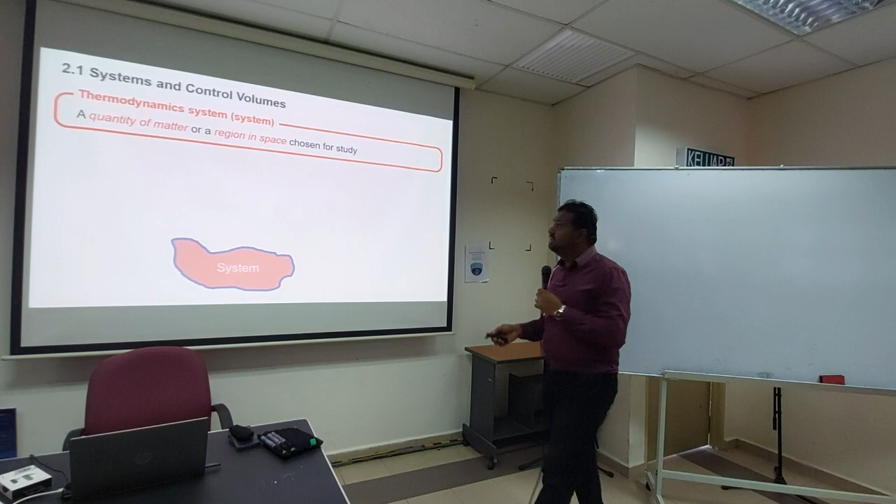Second, surrounding: the mass or the region outside the system. So you have a system and you have a boundary, the blue color, and apart from that you have a surrounding. This is what we call a surrounding: the mass or region outside the system, whatever is around the system. So in today's lecture we will study certain related terms. Then we have boundary.

The boundary is the real or imaginary surface that separates the system from its surrounding. You can see based on the color; here it looks like red, but it's orange. The orange color represents the system, and the blue color is the boundary. The boundary can be something that can be seen, which we call real, something physically available. And imaginary means something that is not there, but you imagine it is present there.

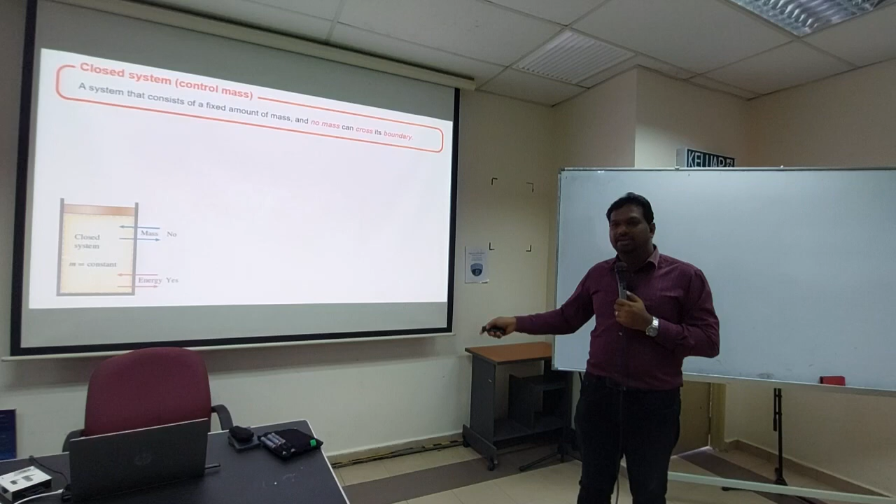So no mass transfer, but energy can transfer. Let's say you heat up this gas; the energy will move in and out because it can go past the boundary, but the mass is not changing. That is the closed system.

Okay, then we have an isolated system. An isolated system is a special case of a closed system. So an isolated system is actually a closed system because the mass is constant. Mass is not changing. It's a closed system. But in the isolated system, energy is not allowed to change.

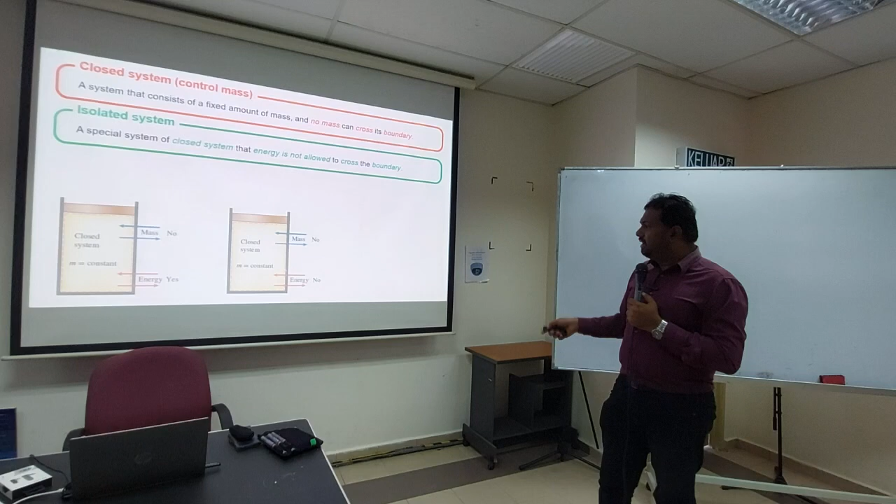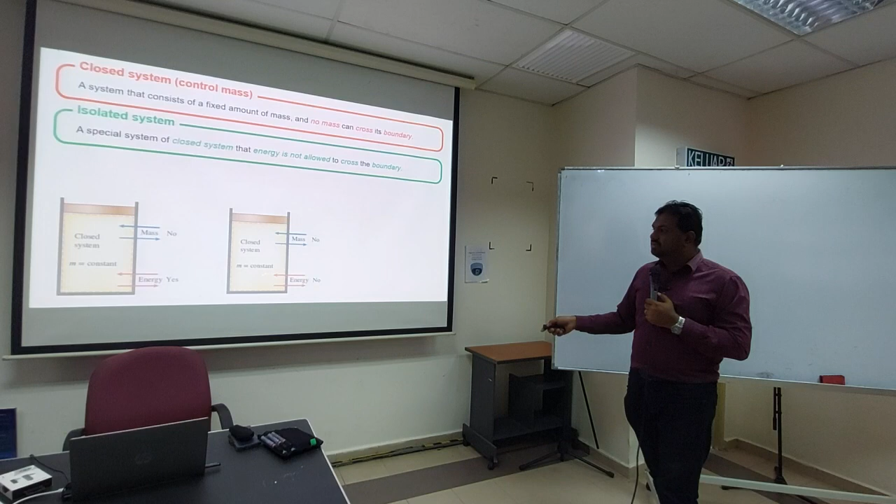So earlier the energy can change. It can go in and out of the system to the surrounding. But in the isolated system, energy also is not moving. So mass is already not moving in and out, so it's fixed. And in an isolated system, even the energy is not changing, is not moving. Okay, so far okay? So you can understand?

Okay, then we come to the open system. Open system, the other name is control volume. So the volume is controlled. So you have an open system here. An open system normally will have an inlet and outlet. So here the mass is not constant, so mass can go in and out. Mass transfer is happening, energy transfer also is happening. So when mass is going in and out of the system, the energy can also transfer.

But here the volume is constant. So even though it's expanding or shrinking, the volume will be constant, but mass is not constant. So the definition: open system or control volume is a system where both mass and energy can cross the boundary of a control volume. So open system, mass and energy can transfer. Closed system, mass is not changing but energy is transferring. Okay, so far okay?

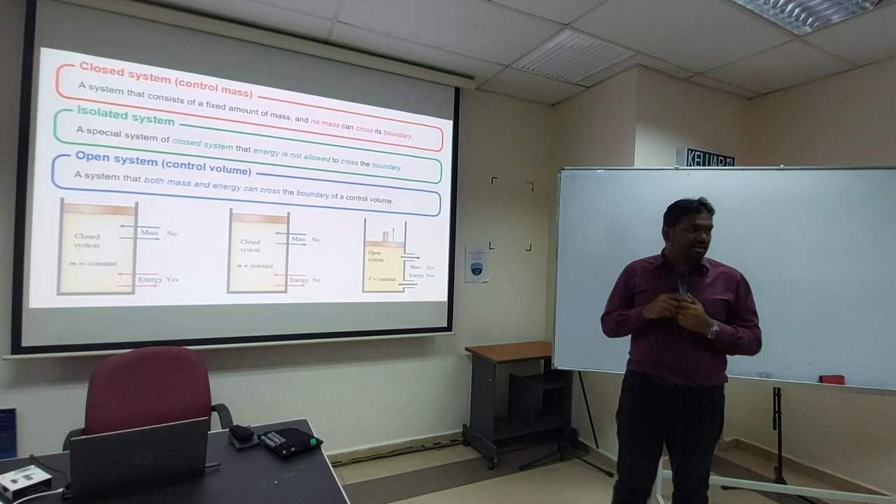Okay, so you have another 40 minutes.

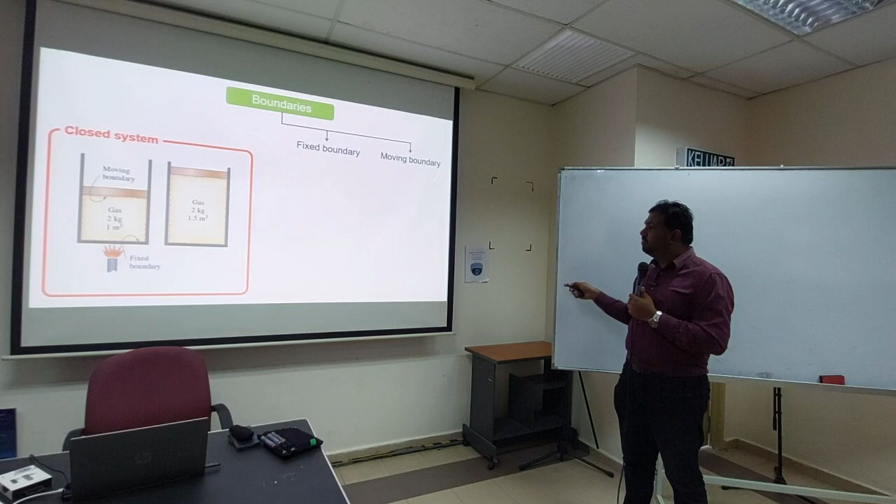Okay, so boundaries. I think you already understood the concept of boundaries earlier. But the boundaries, we have a few types. One is the fixed boundary and one more is the moving boundary. So you have a piston, or a container. You have 2 kilograms of gas inside and you are heating this container. So here you have a piston moving up and down.

If you can see the dotted line, that is the boundary. At this side it will be fixed because it cannot go down, but the other boundaries can expand, depending on the energy transferring from the heat to the system. So after some time it will become like this, it will be elongated. This line is elongated, this one is moving, and this one is fixed. So this is a fixed boundary and this is the moving boundary. So that's the first thing.

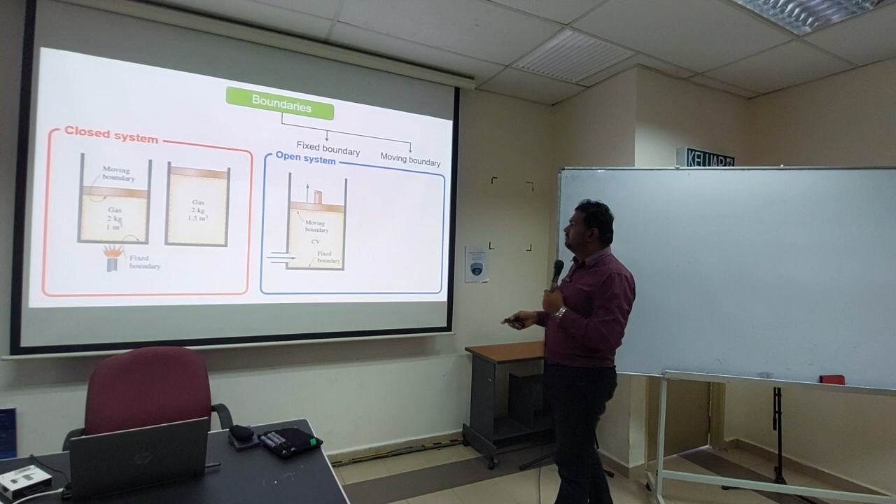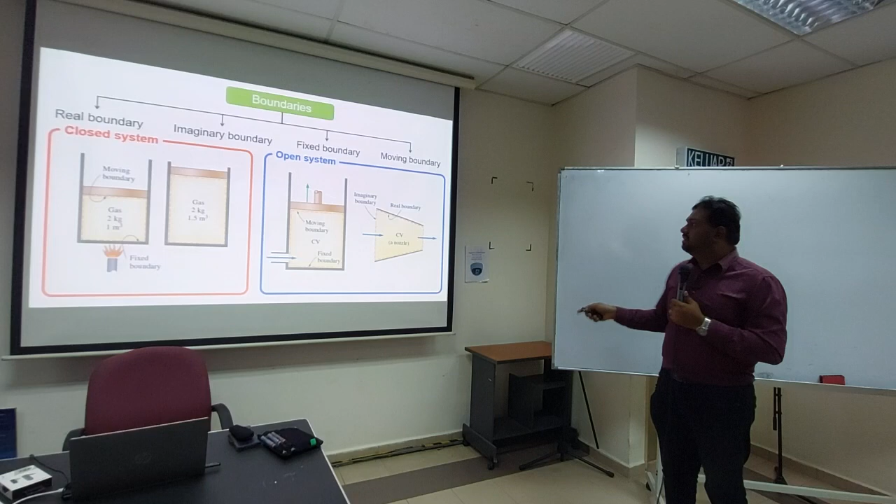Second, for the open system, you have a fixed boundary and also moving boundary here, and there are two other boundaries available. One is the real boundary. So here you have a nozzle. An imaginary boundary is something that is not connected to the surface. You can see the black line, that is the surface of the nozzle, and the real boundary is connected to the surface, but on this side you don't have a surface, and this side also you don't have a surface. So this is considered an imaginary boundary, and this is the real boundary. Okay, so far so good, can focus, can understand.

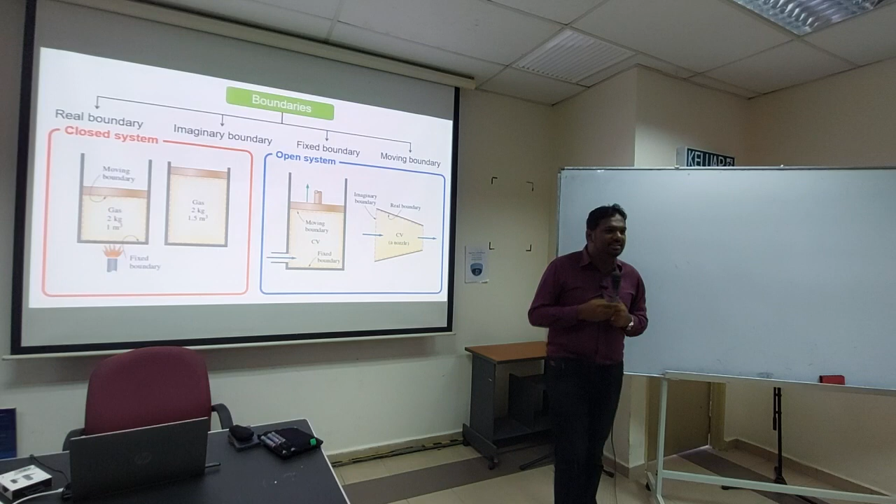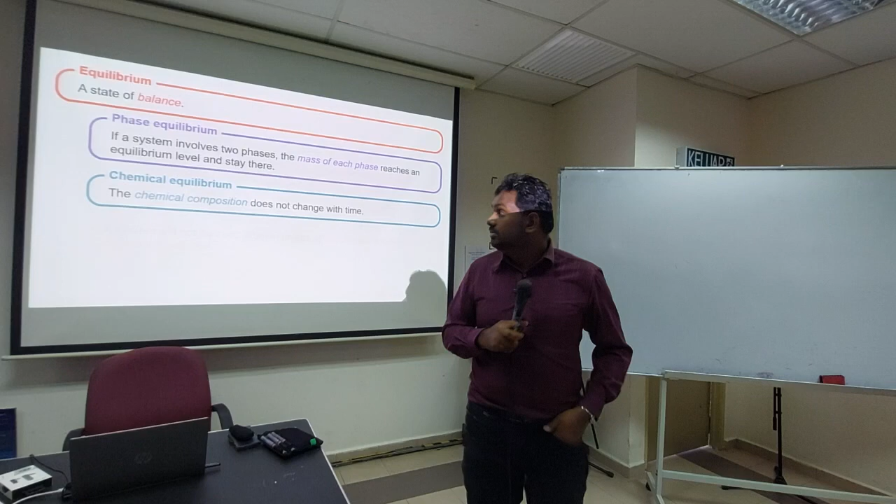So the thermodynamic relations that are applicable to closed and open systems are different. Therefore it is extremely important to recognize the type of system before analyzing it. Thermodynamics involves a lot of calculation. So before you do an analysis, before you do a calculation, you need to determine whether it is an open system, closed system, what is one more? Isolated system. So you have three systems. Isolated normally will not be in the picture, it's a special case. So normally it will be open system or closed system.

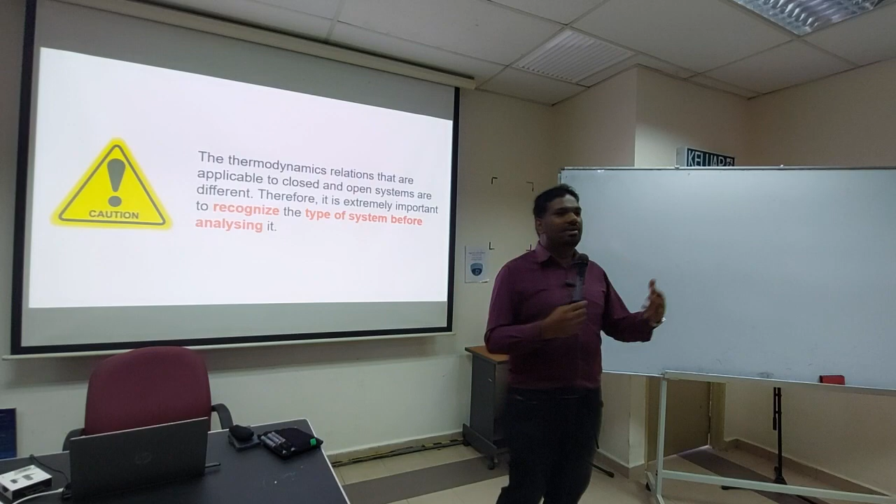So only those two. Before you do an analysis, it is extremely important to recognize the type of system before starting your analysis. Because if it's a closed system and you do a calculation for an open system, you will get the wrong value. Similar in your exam. So later when you do the exam, make sure you analyze first whether it's an open system or closed system.

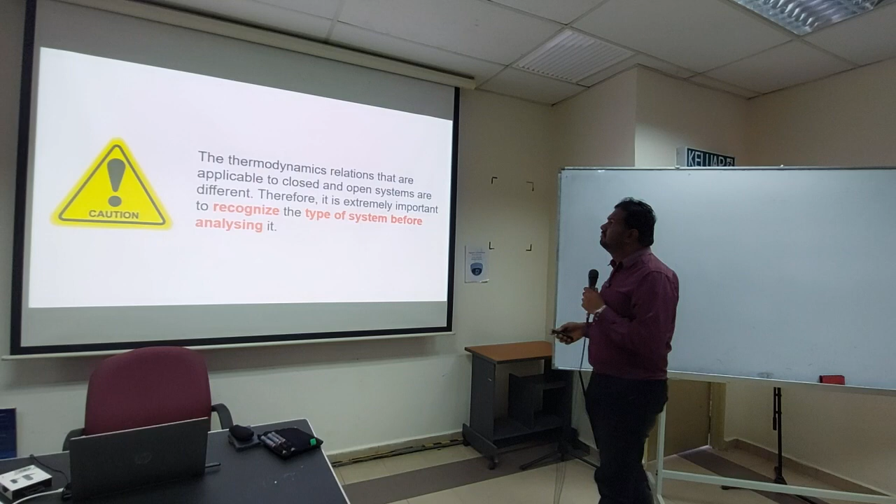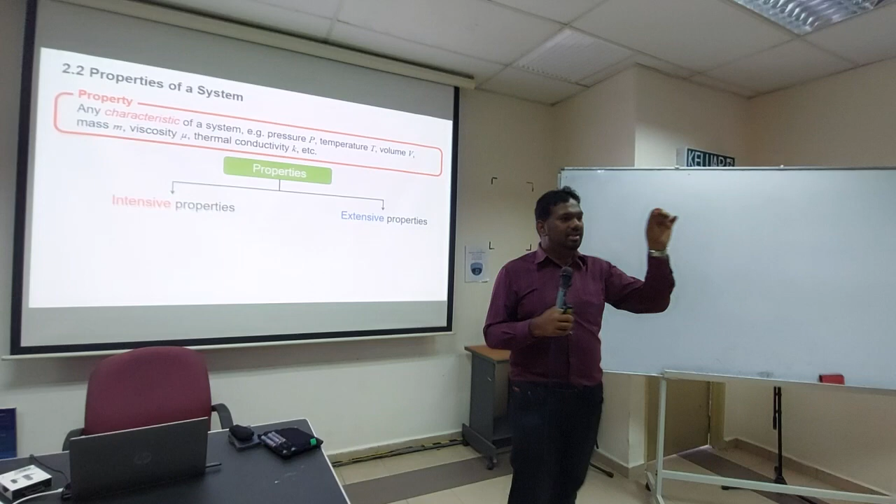Okay, so then we will study one more, properties of a system. What is property? When you have a system, you need to have certain values for you to do calculation. Without these values, like earlier we saw mass, velocity or volume, you cannot calculate. All these are values for you to use in your calculation. So that is simply what property is.

So property in a system is any characteristic of a system. Example, value of pressure, value of temperature, value of volume, value of mass, value of viscosity, thermal conductivity. All these are examples of terms used in thermodynamics. All these values are important because they carry a characteristic or a property, which you will be using in your calculation.

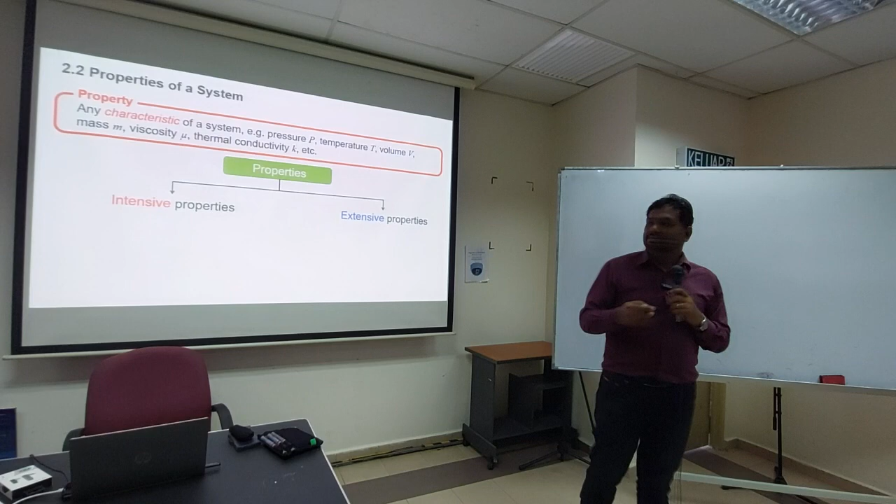Okay, so properties can be divided into two. The first one is intensive. The second one is extensive. So there are two types. So what is intensive? Intensive is independent of mass of a system, because earlier we saw a system is having a mass. So intensive property is something that is not related to mass. Independent of mass means it is not related.

So like temperature, temperature is not related to mass. And pressure is not related to mass; it's two different things. And density is not really related to mass. So all these fall under the intensive properties category.

Then you have extensive properties, which depend on the size or extent of the system. So you can have a total mass in a system. Then you can have total volume. So volume is related to mass. Mass is related to mass, right? And momentum is also related to mass. So all these are examples.

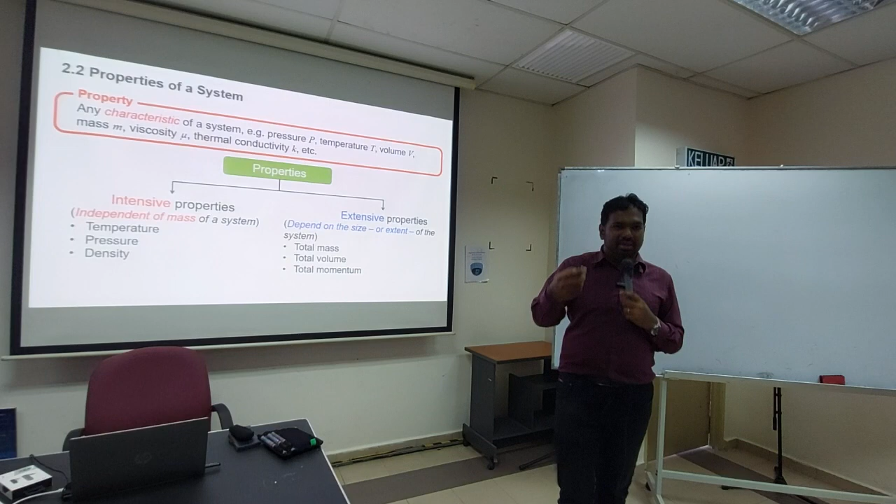So if the property is related to mass, you put it under the extensive properties category. If not related, you put it under intensive. Okay.

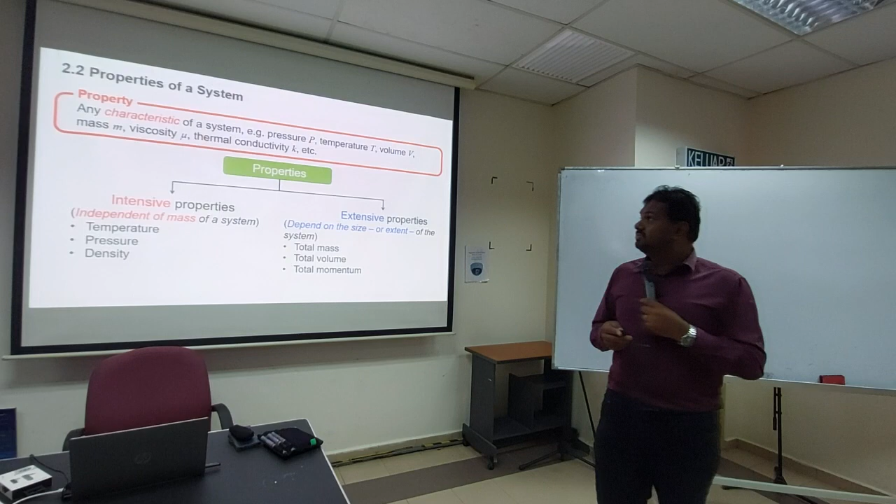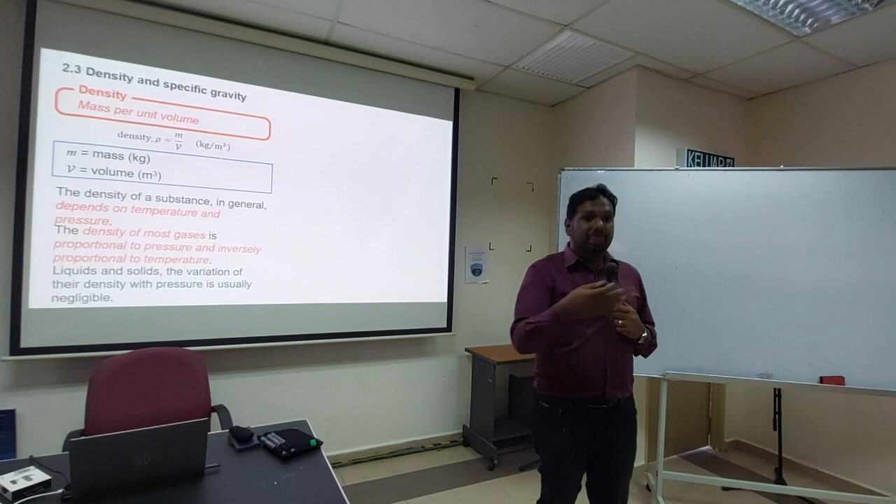So similarly, if you want to do an analysis, you need to know whether it's an open system or closed system. Then you need to check what is inside, whether it has a liquid, a solid, or a gas. Based on that, you can determine what method you want to use to solve.

Okay, so we have specific volume. Earlier I said if the term specific is used, it is per unit mass. So specific volume is volume per unit mass. The calculation is small v equals big V divided by m. Density is m over V, so here V over m is the opposite: 1 over density. The unit is meter cube per kg. So all these things you know.

Then a term called specific gravity. Specific gravity is the ratio of the density of a substance to the density of some standard substance at a specific temperature, usually water at 4 degrees Celsius, for which rho H2O equals 1000 kilogram per meter cube. This is another term used in thermodynamics for your calculation. Let's say the substance is wood: the density of the substance divided by the density of water.

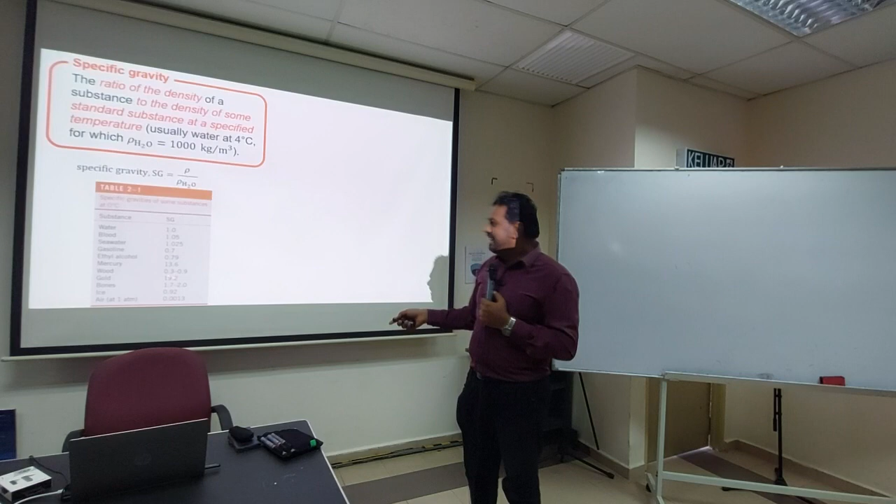Similarly, if you put petrol on the water, it will float because the density is lower. Gold is 19.2. If you put this, call me, because I want to come and take it. Bones. Ice cube, why is it floating? Because the density of ice is lower. Air is very light. So you understand specific gravity.

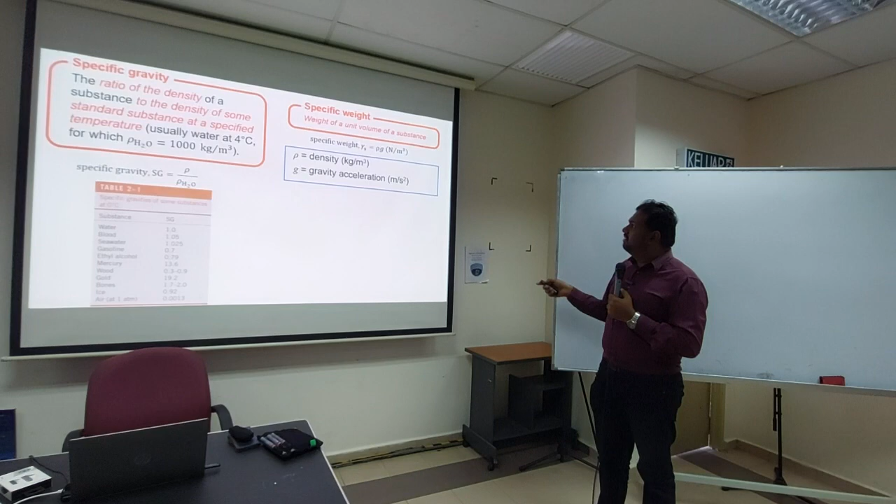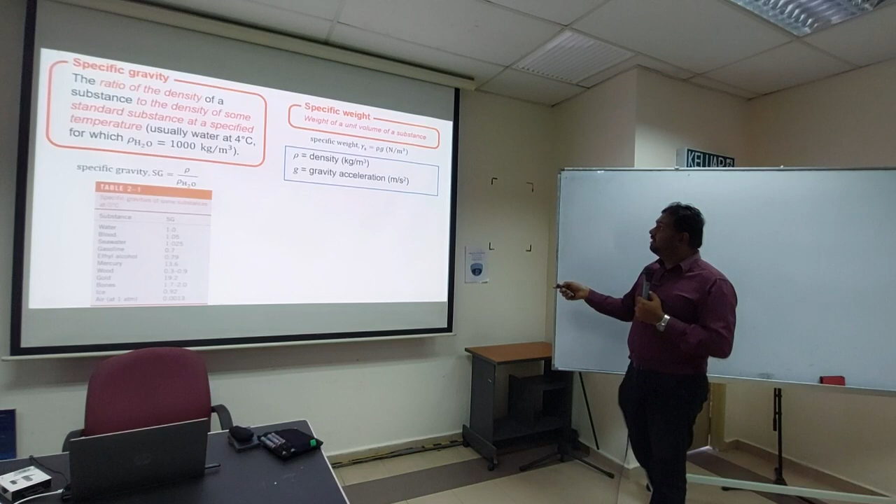And one more term, specific weight: the weight of a unit volume of the substance. Specific weight has the symbol gamma, equals rho g, where rho is the density of the substance times gravity. So you get the specific weight.

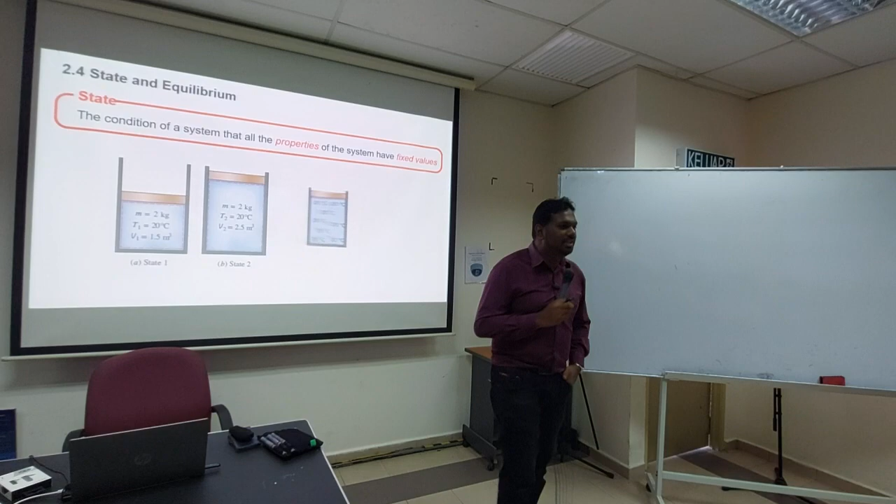Okay, any question? That's all for today. 10 slides, right? I said we study little by little. The main thing is you understand. Okay, ready for questions?